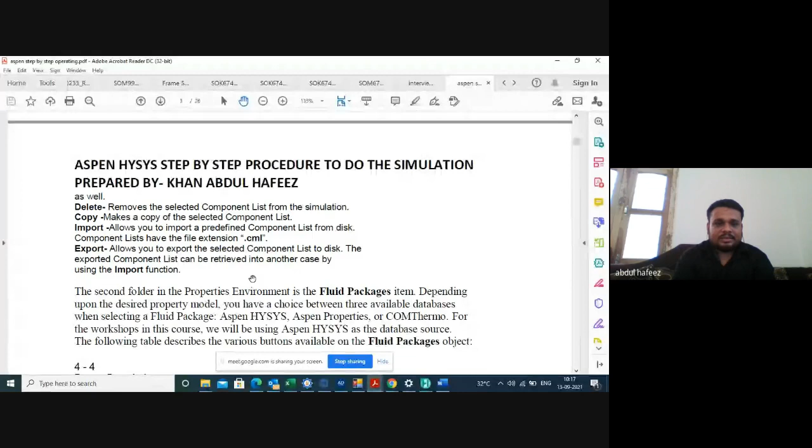The second folder in the properties environment is the fluid package item, depending upon the desired property model. You have a choice between the available databases when selecting a fluid package: Aspen HYSYS, Aspen properties, or COMThermo. For the workshop, we will be using Aspen HYSYS as the database source. The following tables describe the various buttons on the fluid package object.

So this thing, already I have explained.

Now we will see the second point, the component list folder in the navigation pane. Click the add button. Start by adding the first component. In this case, normally I've taken an example just to make you understand. We are taking nitrogen.

Again, search for the field in the component list. Again we are taking H2S, CO2, methane, ethane, propane, isobutane, n-butane, n-pentane, i-pentane, and so on. So normally we have taken the hydrocarbon system.

You can select multiple components by holding down Control on your keyboard and selecting the desired components. If you have the components in the database sequence-wise, you can just click Control and select. But if you have different components which are not available sequence-wise, then you have to search and select.